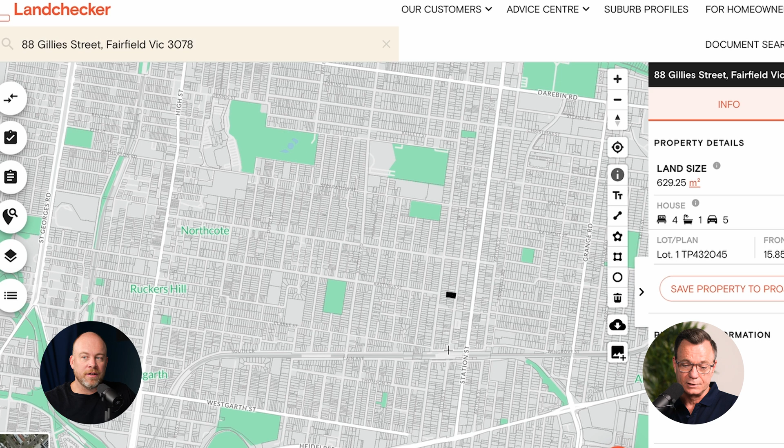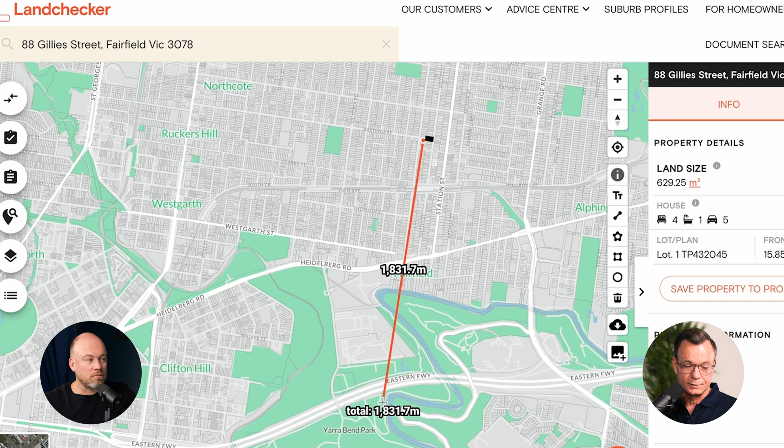Yeah, I must admit this is definitely one of my favourite sites. Look, its location. And further to that, you've got High Street, which is just over here, High Street Northcote. This is where all the cool kids hang out. And then a bit further north at Thornbury, High Street as well is very, very popular. You've got Darebin Parklands just here, and a bit further south you've got Yarra Bend Parklands, which has got the golf course, heaps of sporting grounds. It's a great area, and it's very, very close to home.

Would people find you down there on your mountain bike on the weekend, Gav, from time to time? I can tell you that there are some fantastic walking and mountain bike trails all through that area, right out to Westerfolds. So yeah, love it.

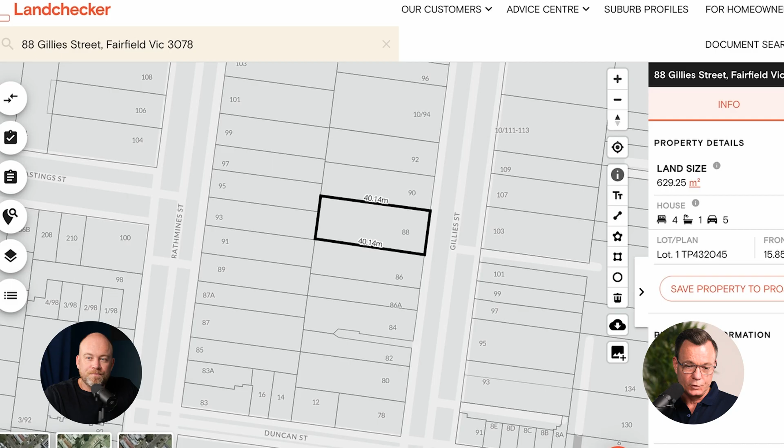All right Gav, let's get into the bits and pieces and the variables of the site. What have we got? Zooming into the site itself, as you can see here, that's Station Street there, there's your town centre, so we're literally one street back. We've got a 630 square metre block, it's a 15.8 metre frontage, so the frontage is good. It's also a GRZ2, so what that means is we've got 60% coverage.

So nice, which is most areas 50%, some areas up in Banyule are 40%. 60% is fantastic, but added to that is this front setback, which is amazing. Yeah, so that's really nice, Gav.

So with 60% coverage and your front setback, what that does is allows us to build a decent sized townhouse, but also what it does is it'll provide some decent backyards, and it's an east facing lot, so you're still going to get your northerly sun through the day, and then in the afternoon you'll definitely get sun in through those back backyards and through the back of the living areas of the house.

Yeah, nice one Gav, I think it's a great point just with that site coverage. Like a 630 site isn't a monster by any stretch, but when you can get it in a zone that does give you that 60%, it just gives you a lot more freedom, and you've got that small front setback. So for all those reasons, that's why we're excited by it, and essentially that's why we purchased it for our client.

And what it has allowed us to do is we've planning to build 2 30-square townhouses. So not only are we going to get a decent sized backyard, but we've got a bit more room to work with in the actual design.

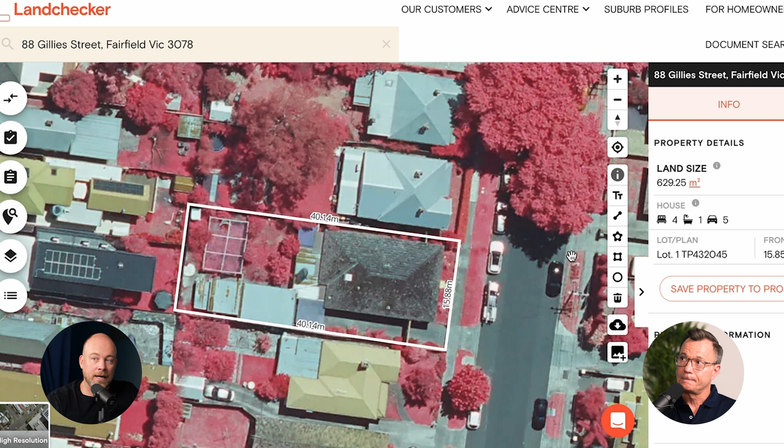100%, and it is a nice outlook. We'll have the team arrange the power pit, so power will go underground, which is standard with all these type of townhouse developments in these areas, which will just mean the outlook is quite nice.

So I guess we get into the meaty part of it, Gav, the numbers and the feasibility. Yeah, so it initially came to us, like I said, off market, and they were asking sort of 2250 to 2350, and they were pretty flexible with maybe a longer settlement. For us, it was getting pretty tight around that price, that buy price.

We didn't think it was off the charts expensive, but just from a numbers perspective, from a project perspective, it was getting a little bit tight. So we negotiated back and forth with the vendor and ended up getting it down to 2125.

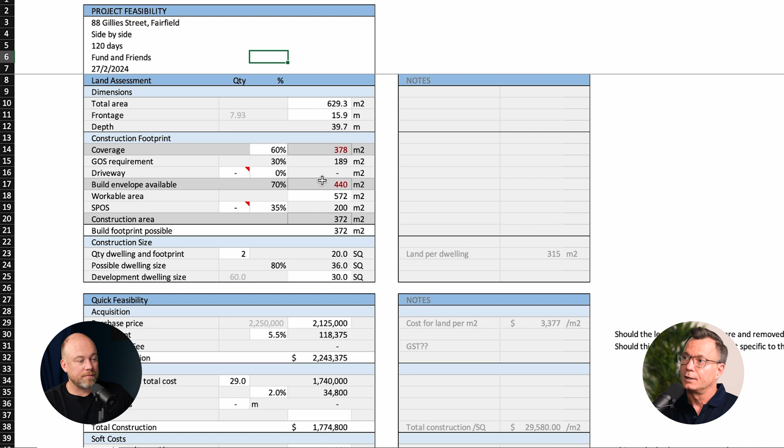So probably a good $100,000 underneath the bottom of the range. But we also agreed to do a 4-month settlement. We probably could have gotten 6+, but our client, the investment fund, is a cash buyer, and a longer settlement doesn't impact them as much. So we used that as a bargaining tool to get the price down. Still, 4 months is terrific, and we managed to pick it up for a great price.

Yeah, awesome. The price does look good, and knowing what we know about the site, the price looks even better. But can you talk us through the build prices and the other costs you've got in there?

When we do these feasibilities, which in this case was February last year, we can only enter the data we know at the time. So we allowed 29,000 a square for this feasibility, which is pretty healthy, coming in around 1,775 for a 30 square townhouse. Keeping in mind, maybe a little bit larger than what we'd typically do, but we thought there was value in this area for doing that.

That price may have moved a little bit over the last 12 months. Yeah, potentially, and it's also valid that in the last 12 months we get to watch what's happening out there. When we bought this, it was reasonably flat, I suppose. Interest rates had been going up for a long time, so definitely not at the height of the market, and it had slowed down.

I think it's important to note that our team watches the market and continues to watch it. It's not good enough to buy a site and say, hey, this is the Feaso, come hell or high water, this is what we're delivering. You need to keep a close watch on what's selling, what's for sale in the area, speaking to agents and keeping your finger on the pulse. Which we'll get into with Claire in our project Snapshot segment, but I think the sale price will tweak up a bit, for good reason, because of the data you guys are getting and the amazing area that it is.

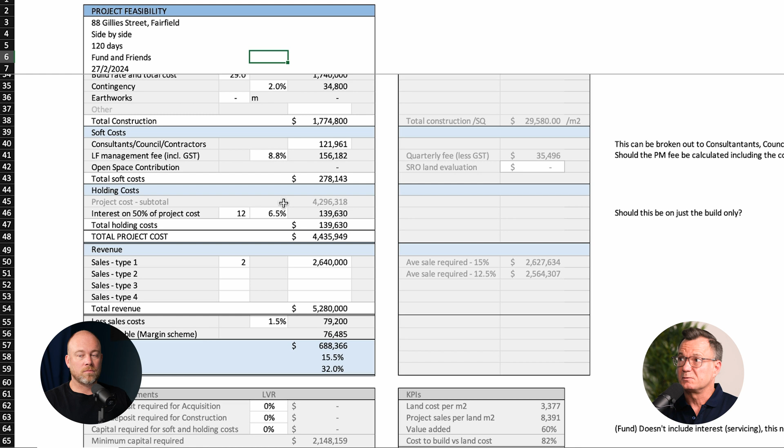Yeah, awesome, that's a good point. Essentially, we had our buy price there, we've got our resales in there. Could we have argued a bit higher at the time? Maybe we could have, but if a site stacks up, it's good. We just get it, let it play out, and then revisit the feasibility closer to build, which we're probably getting close to about now.

Which I think all those things will dial in, but it's a good lesson that once you buy it, it doesn't mean set and forget, and your numbers aren't going to be the same as when you started. It's super important to watch that market intimately, and once your plans come to fruition and you get your permit, you're dealing with real life things rather than estimations. So it gives you confidence to wind your numbers up or down, whatever it may look like.

So, Gav, well done. You're Australia's number 1 site expert for a reason, finding sites like this. It's a great site, a fantastic location.

All right guys, let's get into it. Project Snapshot, super excited about this one. Obviously we just went through the acquisitions with Gav.

Now we've got Claire, our little fish head of projects, currently managing 80 sites, mind you. I had to crowbar her up here last week to give us this value, but it's super important we get it from the person managing the team managing the projects, because the insight is invaluable, and the intricacies Claire will go through, they're the lessons. Staying high level, I don't think you learn as much, but going in and understanding why council made us do this, why we made this decision, all those things are the nuggets that are going to set you guys up and protect you on your projects.

So Claire, Little Fish Head of Projects, thanks for coming back. Thanks for having me again. And just to be clear, I do love my 80 projects, but this is the highlight of my week. Oh, thank you, well said. Well, maybe we'll get you back next week.

So this project is a bit of a staple favourite, I suppose, and I know it's one you're super excited by. Why does this one excite you? This is probably my favourite project out of the 80 currently. I love it, I love the facades, I love the design, the location. When we first acquired it, you and Gav, and went out to site to have a look, it's 2 seconds from the main strip, Station Street, and it's just got a great feel about it.

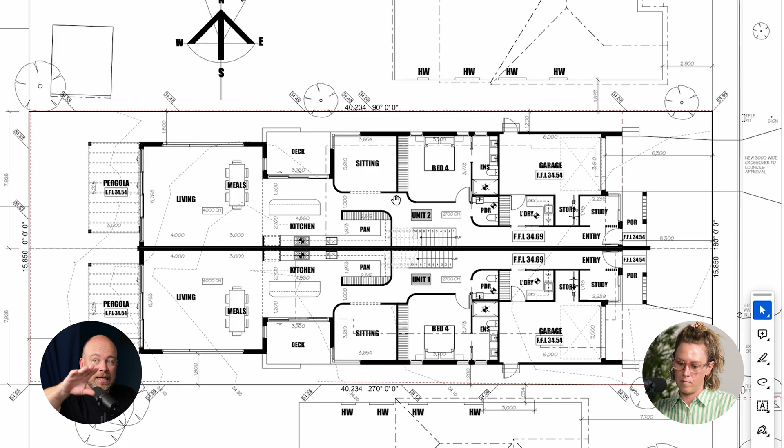But that pantry, that long bench space, those long pieces of stone, I think are going to be super high end. A hero. And on a summer's day, you open this up and it becomes your entire kitchen and dining space. Yeah, spot on, it's a real flexible space.

For everyone playing along at home, these plans do evolve, so wait until they evolve. The crux of them is here, but these do get better. So if you want to take us upstairs, Claire.

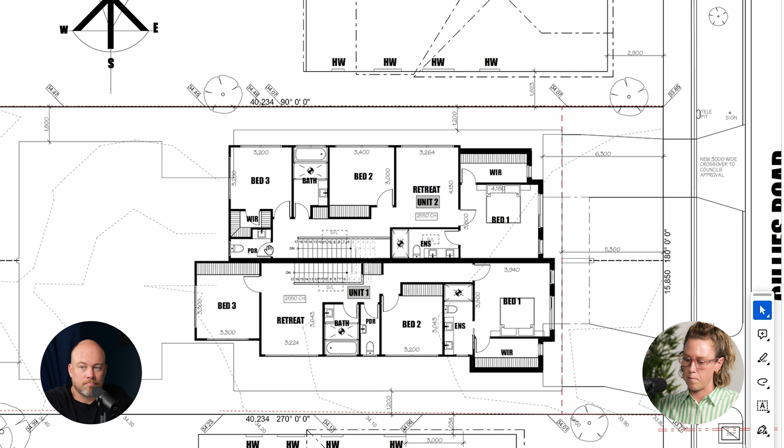Upstairs, like you touched on before Peter, genuine master space with a genuine walk-in robe. We've achieved the walk-in robe, and this is the same amount of storage as downstairs, but we have the luxury of being able to hide it, which people do love and appreciate. We've also got our second living in both of them, plus 2 extra bedrooms and a bath and separate powder, which is a great value add.

I don't mind the toilet in the bath, but separate powders are a huge win, and a lot of people like it. I don't know what your thoughts are. Yeah, I think if you've got the space, you can do it for sure, depending on your family makeup. But sometimes there's value in making your bathroom bigger.

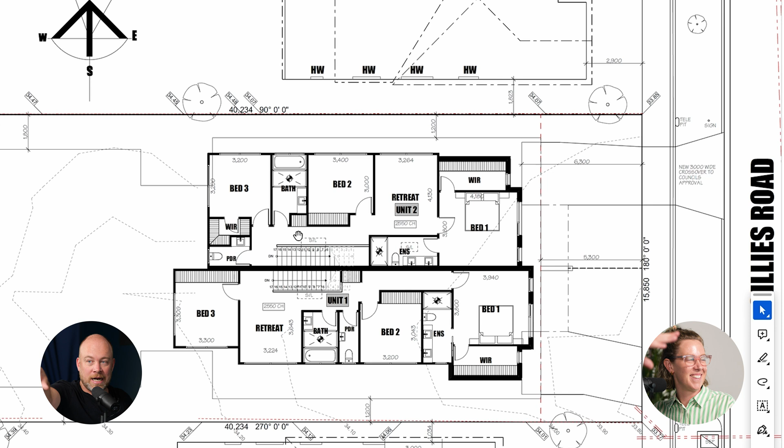I think, Claire, that bedroom 3 on the top unit, that walk-in robe there - and I'm assuming these plans are going to evolve and I'm not sure that will live on - that's an example of a walk-in robe that is not of any value. Get it out of there and make it a built-in robe, and you'll get more storage. But that is exactly - you got me hook, line and sinker - because that is just frustration, that is awkward and that won't work and won't live on.

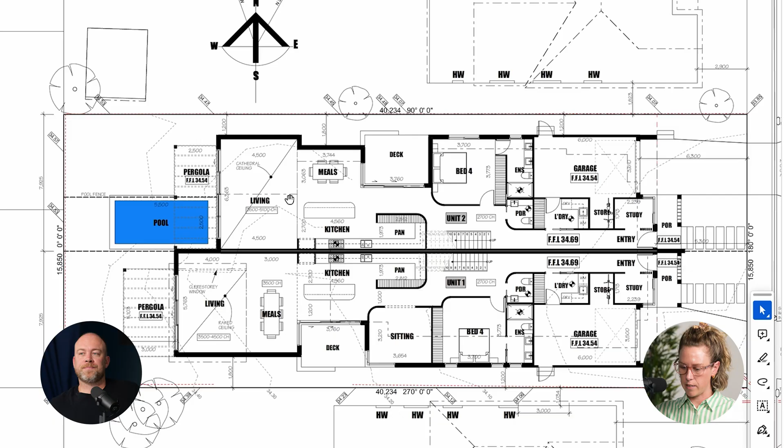So essentially, the front has stayed relatively the same. Your master is here, it's been tweaked slightly, just more about the location of built-in robes, but the masters are still both there. What we've done in this north unit is we've actually removed the sitting, pulled back everything to ensure we can fit the pool in and still get a really good backyard.

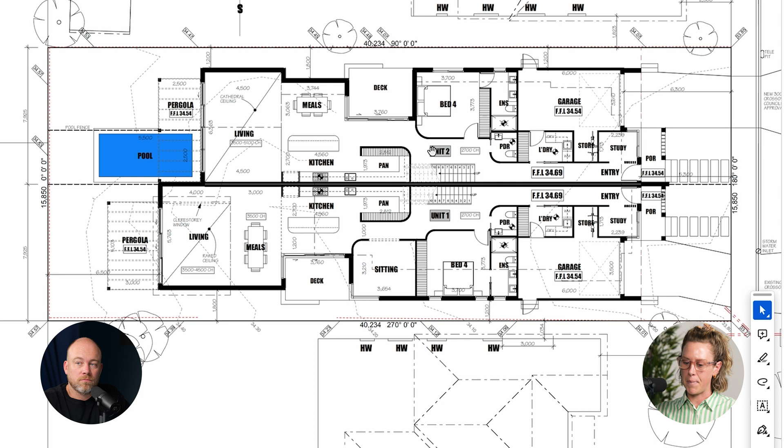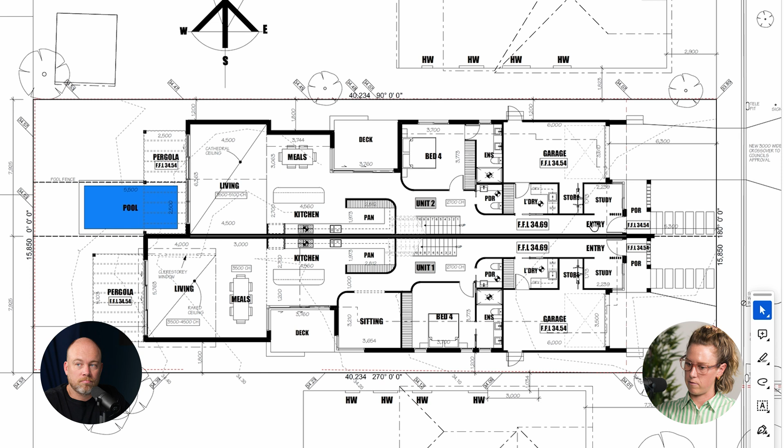It's also minimising the overall size of the build. We didn't touch on it on the last plans, but we were at 29.5 squares for both. Now we're sitting at just over 29 for Unit 1 and just under 29 for Unit 2. So we're going to minimise a little bit of the build cost in terms of size, which gives us justification for this pool, but also, again, two different products.

Yeah, I like it. I think potentially two different buyers - someone loving the pool might dive straight in, while people not that fussed on the pool but who really appreciate the extra sitting room, which I think is super important. I like what you've done here.

You'll see also at the rear of the property, especially on this south facing side, we included some clerestorey windows up the top, which will gain that north facing light.

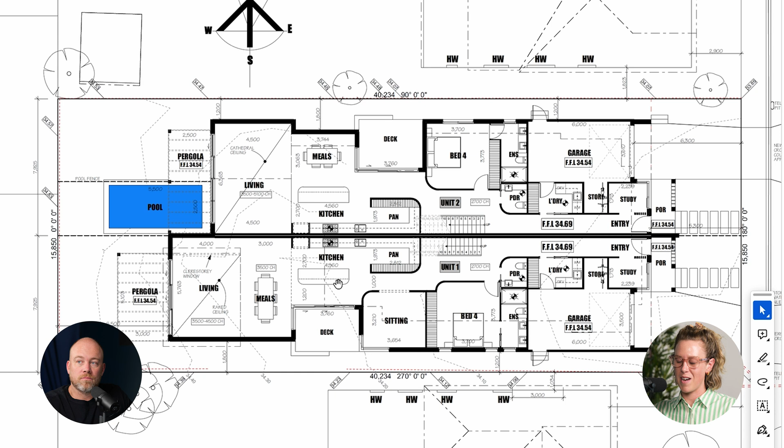That's what I was going to ask you - obviously the north unit isn't going to have a problem with light, but what do we do to counteract that for the south unit? Obviously your backyard will still get a lot of north light, so there's still a great element in this rear. You're also west facing at the rear, so you're going to get that afternoon sun, which is what a lot of people want. What we've done here, we usually do it via skylights or in this case, a clerestorey window, which I'll show you when we jump down to the facade.

Do you want me to? Yeah, I like it. Well, let's go upstairs and then we'll go to elevation. Okay, upstairs, very similar.

But again, something else to note, which is important for everyone designing at home, is we could have made upstairs a lot bigger. We have the space to move back, which often you'll get clients who want to - they want to push the limits, but everything costs money, and even though you're just increasing your square meterage, it's still flooring, plaster, timber. So to ensure you're containing that build price, you don't need to go overboard just for the sake of it.

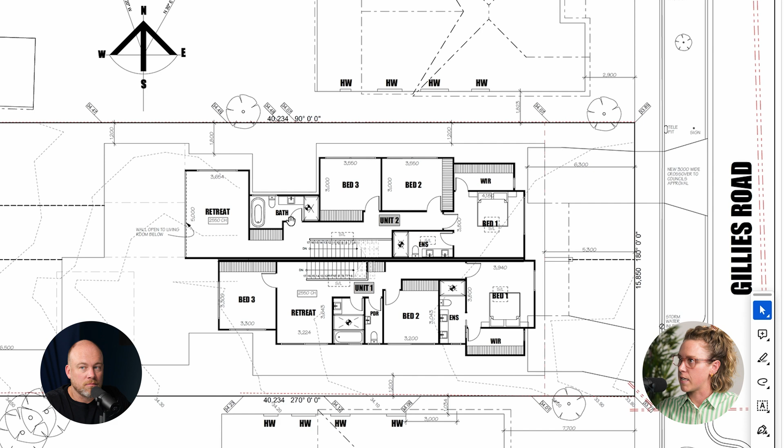And that's probably another reason we removed that living downstairs, that third living, I should say. Yeah, spot on. I think that's a great point, because just because you can doesn't mean you should. And when you get to that build tender stage, those prices will flow through.

And if you've decided to sneak a square here and half a square there and half a square there, it'll definitely flow through to your build prices. So that's a good one. And the thing is, nothing has been missed here.

No one's going to walk through these properties at the end and say, wow, a bit pokey. So you've ticked all the boxes, and ultimately these need to be commercial decisions unless you're going to live in them and extra space is close to your heart. That's fine, but while you're developing for profit, it's important that you don't go overboard and you dial it back where you can.

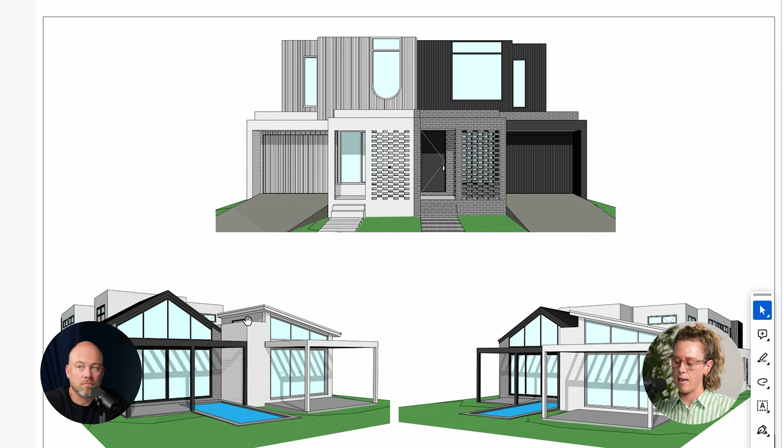Okay, facades, let's go. So we've got facades and the rear here. The idea was to have a very similar form across both units, but create a brother-sister feel through colour and materials, which is what we've done. We've gone with black and white.

At the rear, what we've done, and this is what we were talking about, if you highlight in here, this is your clerestorey window, which will get that northern aspect. Lots of glass in the rear, trying to create as much light, and heightened ceiling spaces internally. Looks high end, looks like money, looks good.

So have these evolved? They have. Once we got the council RFI and the comments back, you will see, we'll get to it, but they have changed quite a bit.

Yeah, and I think that's important. This is the bit, guys, that you want to listen into hard, because dealing with councils, that's where you can win or you can lose. So I'm really interested to hear how the team navigated these decisions and navigated the request for further information from council.

Okay, great. So these are the floor plans by the looks. Got all the detail in there, got all the services, looking great. Again, we've tried to, just externally, you'll see a lot more detail on these plans now.

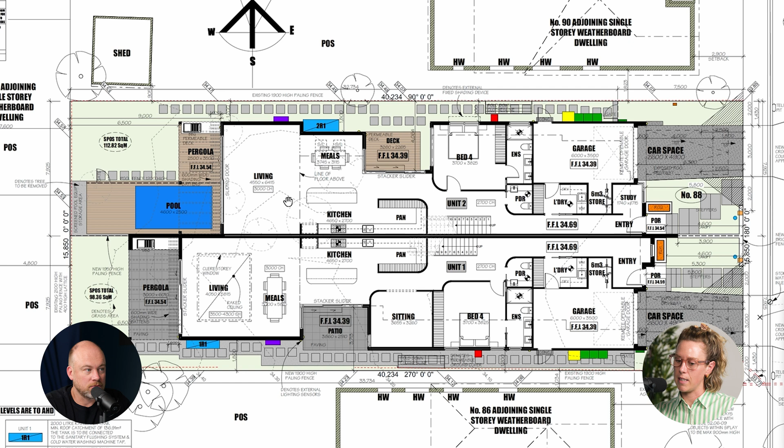We engaged a landscape architect for this job. I suppose the project location, the designer warranted it in this area. So we do have landscape plans. We have spent a lot of time to hide our services, as always.

We've got built-in pool equipment here. We've included deck, we've included pavers for this side, we've got outdoor kitchens by the looks. They look perfect for the product and the area.

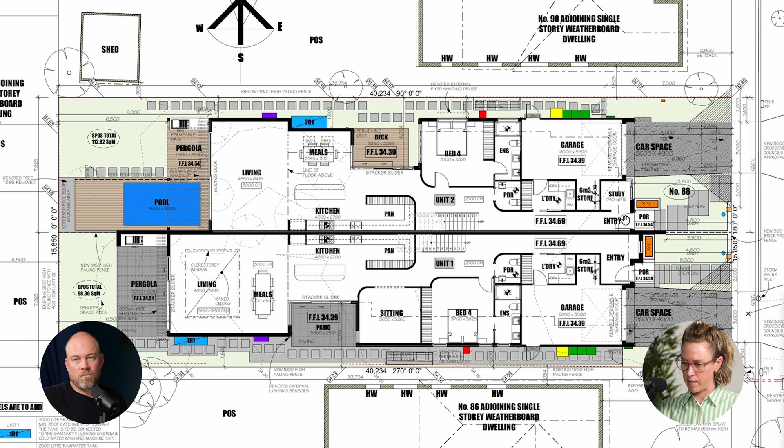Yeah, really good. So these will, which you won't see in these plans but in the working drawings, this joinery will flow on. Smaller details like this wall here have been purposely designed to hide the tank, but for the joinery to fit into this space. So all these elements you don't see at this point, but they will come later in the working drawings.

Yeah, great work. That's a good point, because for people maybe starting out, or depending on what designer you're using, it's super important that you look at those little details, because it will look after you in the end, and people will look at it and go, wow, someone's thought about this, and the joinery and everything flows, it creates straight lines. So that's a good point.

Minor details, but things like we've relocated the step. It's quite a deep step, but relocated it to the stair, which allows this deck, then this whole space will be at one level. That's again with your flood overlay and the height of this building. But previously, the step was out here, which all of a sudden gave you one, two, three different spaces. So we've done that to create larger spaces externally.

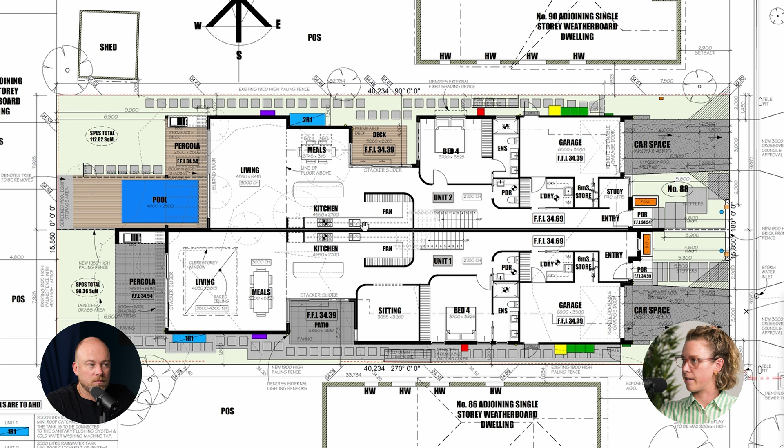All those little elements, when it comes to townhouses, are important, because you don't have land to play with. Yeah, 100%, and I think people are more savvy than ever, and they will look at those sort of things.

I just love that central deck area and courtyard area. You've got your bedroom looking out onto it, you've sort of got your kitchen looking out onto it, and you've even dragged the meals looking out onto it. So that external aspect, nice landscaping out there, this has got real house feels about it.

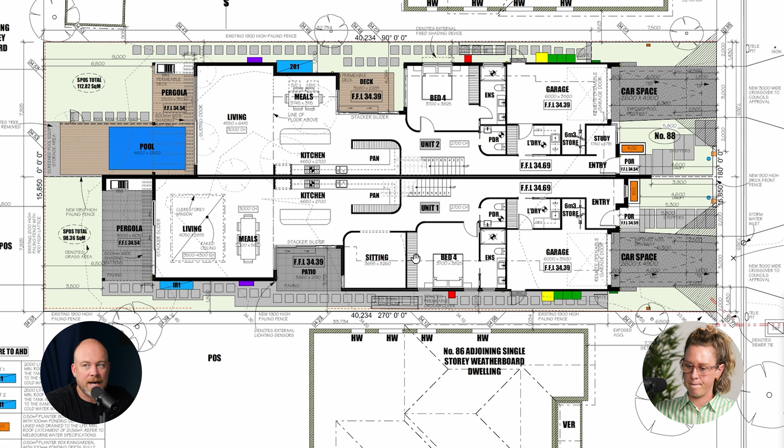Yeah, it's really nice. You'll see we've added skylights here over the meals area, minimised the amount of walls out to your service areas, but haven't shied away from getting light elsewhere.

Yeah, love it. Now upstairs, has that evolved at all? Yeah, we have. So I touched on just before that we created a retreat, sort of downstairs living retreat space as one. As you've probably touched on a lot of times, we always go and get feedback, we speak to agents, we speak to what's out there, and we ended up just going back to a standard retreat as a genuine second living. So your kids can be up there, they can be playing whatever they're doing, but you're not hearing it downstairs.

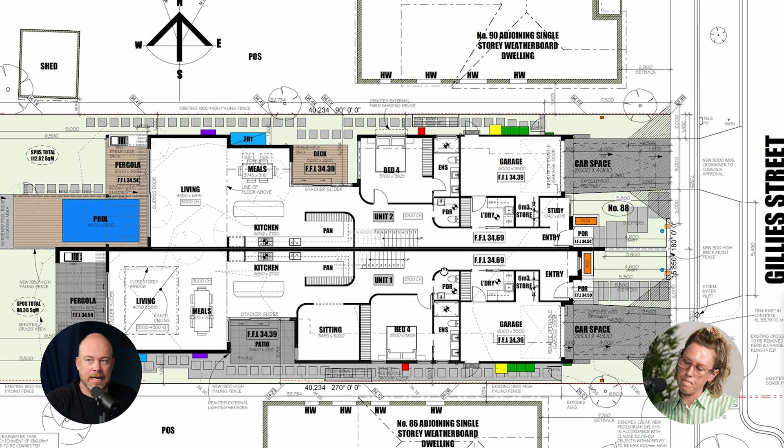Yeah, which is separate - that north unit hasn't got the extra living like the other unit has. So yeah, I think that's an important one to have that second space.

We've included a study, so we did increase the size slightly upstairs on the bottom unit, or the south unit. The prime reason for that is that we removed the study from the entrance to create a bigger entrance.

Good, perfect. And I think it's important - small things that can sometimes fall through the gaps. But that study, that's a half height wall there, it's not a full height wall. So when you come up into that retreat, you've got this sense of space.

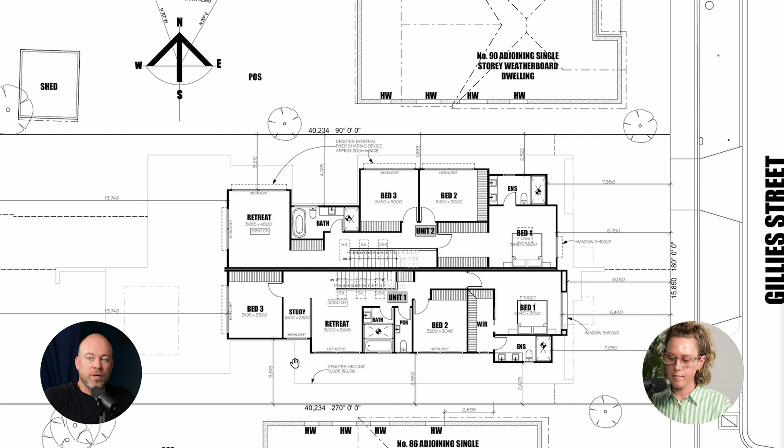That study and retreat and hallway and stair void area is one whole space, which is going to allow light in - it's going to feel much bigger. So I think that's super important, that if it doesn't need to be a full height wall and it can just be a half height wall to break up the zones but still create a bigger feel and a bigger ceiling area, I think that's important.

So that's interesting you bring that up, because it's a small topic, but it's being discussed right now - we're thinking of removing it entirely. There's mixed opinions. One real estate agent has said remove it, interiors want to remove it.

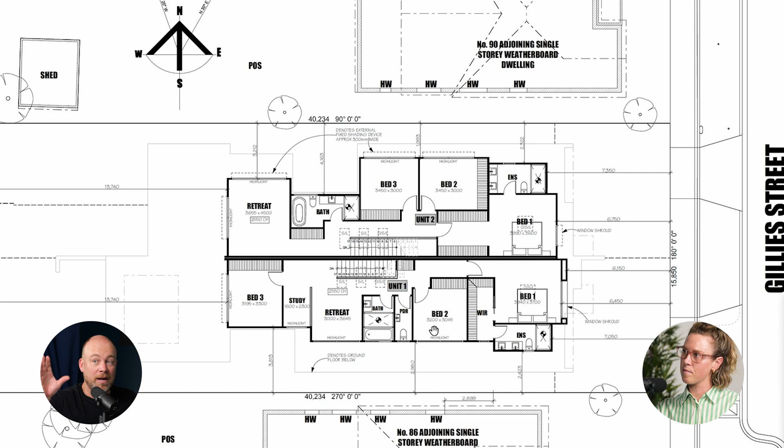Yeah, I actually saw it before and I thought, well, the desk could live on the back of bed 3 wall and that could be your study. So for me, I'm happy to remove it, happy to have it half height, but definitely don't want it going all the way to ceiling.

So anyone out there in the comments, do we leave the wall or do we remove the half height wall?

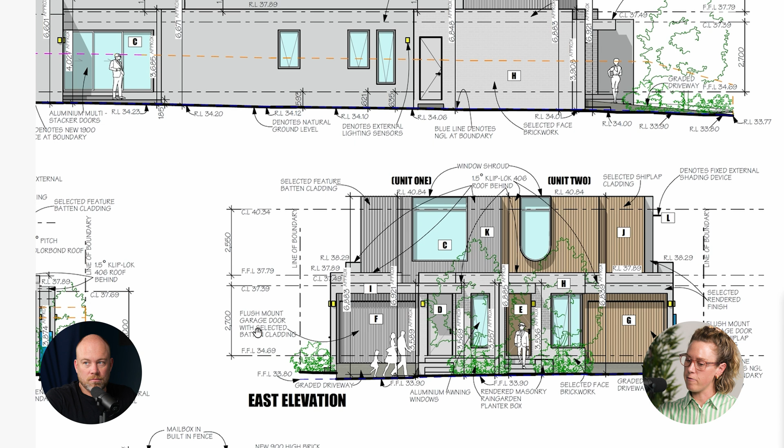Okay, let's go to facades because they have changed a lot. So in essence, the RFI came back from council - they didn't like the dark scheme, they wanted something lighter in that street. On top of that, they also didn't like our flat roof and our overall modern take on the facades.

So I suppose one thing to know with council is give them enough so they're happy. We didn't want to budge on our overall form - we really liked that, we wanted to pop in the street. We wanted these to be a talking point, but we weren't bound to the colours, so that was something we were happy to give up.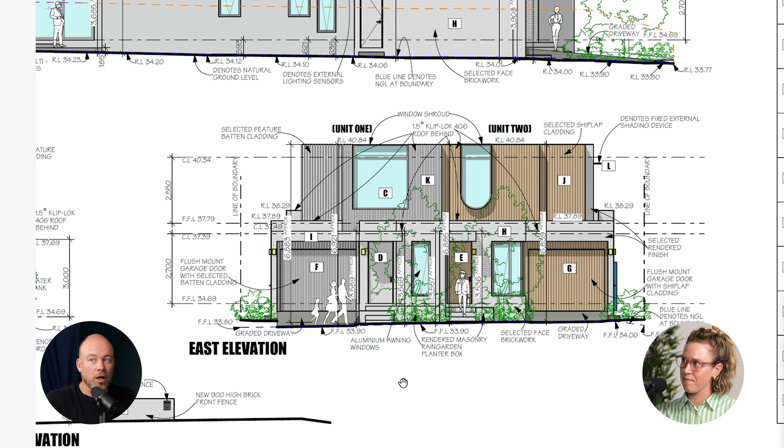As you said, commercially minded, it's not going to change. If anything, to be honest, I think we've got a better product. Yeah, I like it. And I think the lesson in that is picking out what you really want and what you don't want to forego, and then picking what you can give to council to say, hey, if we do this and we do that, then potentially they don't go as hard on you on other items.

So, and this has got a permit as well. Correct, they're really happy with this one. Overall they were happy with the modern look - it was just the colours that were turning them off.

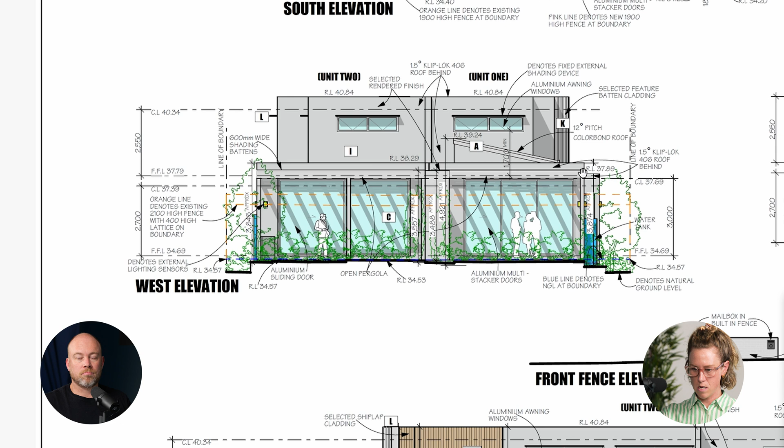I will also duck down to the rear - the west elevation, you'll notice this has changed quite significantly. Also in the RFI, Darebin came back, and any west-facing windows needed to have shading devices on them. So if you remember, we had quite high glass up here - great aspect, but it was going to have to be shaded in the end, which added cost to create the raked ceiling internally. By the time we shaded it, it's just not worth it.

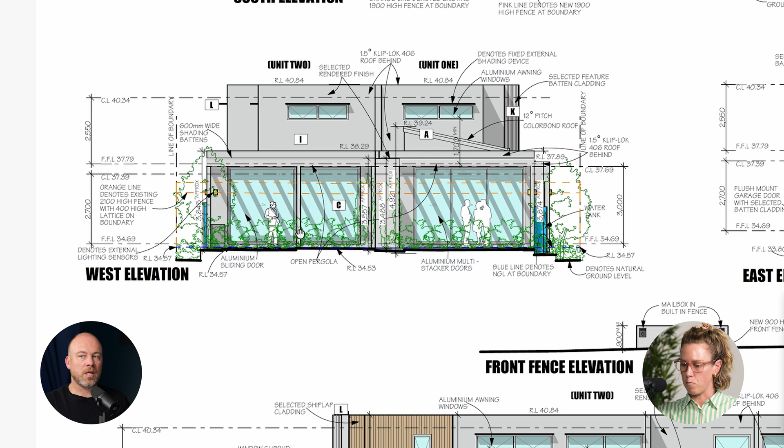We've still been able to create 3-metre high ceilings, floor-to-ceiling glass, which will get a lot of light and get the overall outcome we're after, but reducing the costs of both the louvers and the cost to do a raked ceiling that high internally. Yeah, fantastic. And you can see that ceiling height, door height, glass height is around that 3 metres - I've been in townhouses that have got the 3-metre ceilings, and it is a nice, very, very nice feeling.

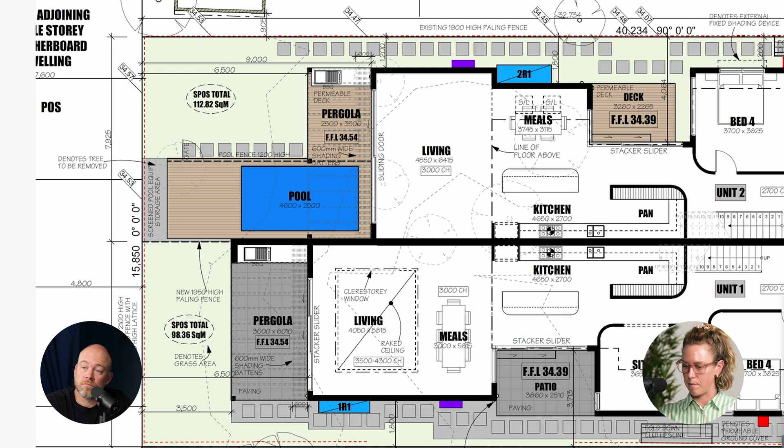While we're here, I will note this fixed glass - probably my favourite feature of the whole development. This lines up perfectly with the pool out the front of it. So as you're sitting in that lounge room, if I can flick back, you will focus on this pool. Yeah, how good's that? And that's an aspect from the living, from the meals, looking straight out to the kitchen. That's nice, it's a nice touch.

Just before we finish up on the facades, you'll see here's this 600 high finished floor level that we were talking about with the flood overlay. So it hasn't impacted it greatly. We've got a couple of steps at the front, but our natural ground level goes up, and it kind of ends up leveling out back here, which has allowed us to get our 3 metre high ceilings.

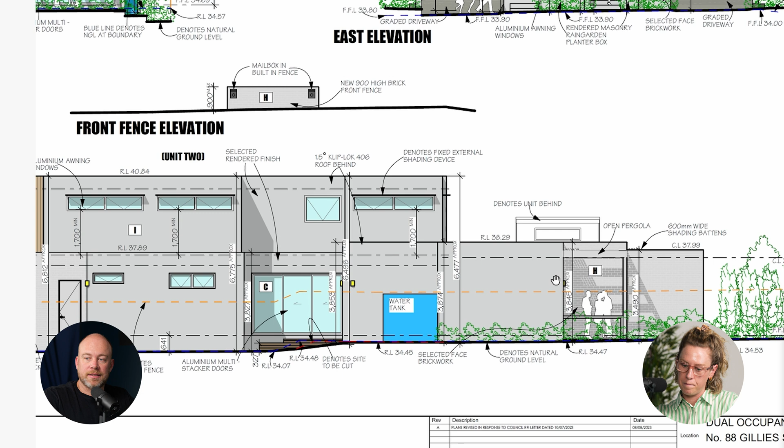Yeah, it actually makes sense, and it's not that big of a deal. Touching on the special building overlay, the flood overlay, it's not anything for anyone to worry about from a buying perspective. It's just Melbourne Water being super conscious about those once in 100-year water events. So it's something you need to contend with, but definitely not something buyers would or should be looking at when it comes time to find somewhere to live.

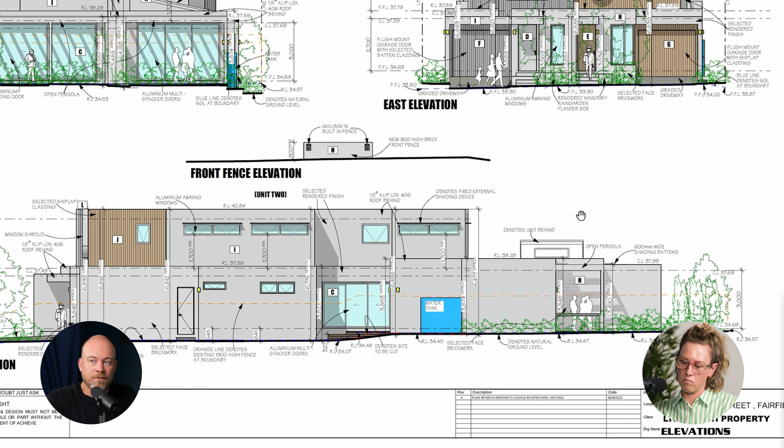No, absolutely not. And I suppose on recent projects with the same overlay, we have gone in and argued to start our natural ground level from that flood level, which still allows you to get the height. So it's something worth arguing if you're worried about your height.

Yeah, good, great advice. Now, where is this project up to now? No doubt you're keeping a close eye on this one. Yeah, we've got a planning permit, like you said. We're currently working on both working drawings and endorsement together, as well as the interiors.

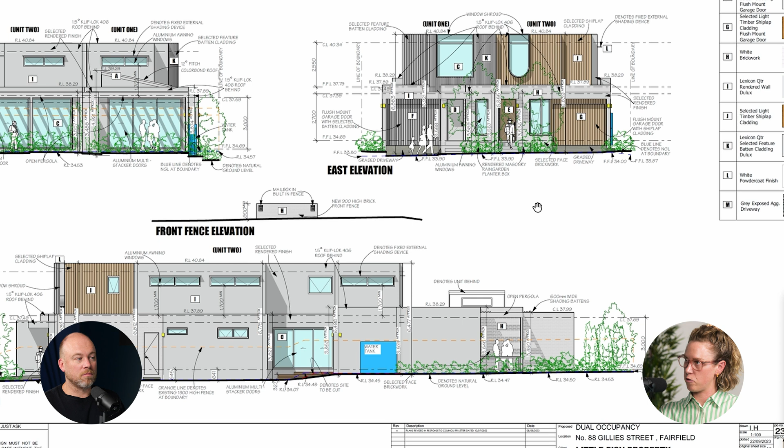We've finalised interior layouts. The interiors team is working on selection of materials, I think we have a meeting on that next week. And then we're due to get preliminary working drawings in about a week as well for review. We're about to sit down with DIY blinds to run through automatic blinds and curtains, which needs to be captured into the working drawings for electrical purposes. And we're due to sit down with a lighting consultant in the next fortnight.

Yeah, so this one is getting the right treatment, I suppose, but based on where resales are headed, I think it's probably justified. Touching on what we touched on with Gav, the resales were circa 2.26, 2.27. We're getting pretty bullish about what's selling in the area and the product that's getting presented here, and we do think we're heading closer to 3, or we could even push past 3. Definitely feel like it's an exciting project, and different results in the area are definitely supporting those higher resale numbers.

I think that's important to note too, because as we see those higher 3+ resales come to light, you look at what's in them, and the expectation is to have automatic blinds, to have a pool, and to make sure you've got your natural stone, all those finishes. So we're constantly looking at those resales and making sure our product is going to hit that value.

Yeah, it's definitely a good point. For anyone playing along at home, it's super important to make sure you're current and know what's selling out there and why it's selling. You can't stay in your own bubble and think you know, because that can leave you unstuck and exposed when you're left with a product that doesn't hit the mark, and then suddenly you're foregoing a lot of resale price and a lot of margin. So keeping your finger on the pulse through design and planning, and then into build and working drawing stage, is super important.